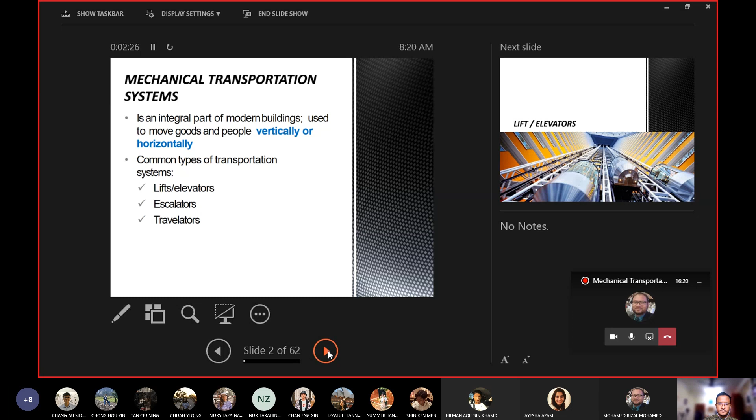Okay, so let's look at lifts or elevators. As you know, this is the most common transportation system in a building. So I think even in Taylor's also you can see a lot of lifts. So every block has at least, I think in block A got 2 lifts, B, C, D, and E got... I'm not sure, B I think probably just one, block C got 3, D and E also got 3 lifts or elevators. So it's a very common transportation system.

So if you look at the image below, do you know? I think you know that it is a lift lah. Definitely it's a lift, but do you know what it is called? That kind of lift is called a bubble lift. So it has glass walls so that people can see the surrounding. And normally it's used in shopping malls, when you have like a huge atrium, a huge area in the middle of the shopping malls, or we call it atrium.

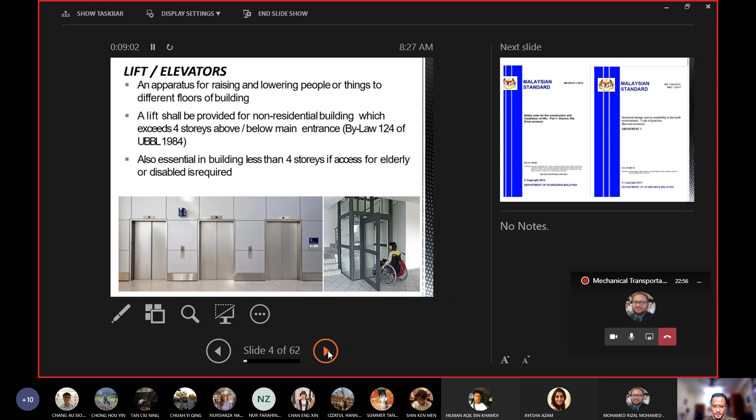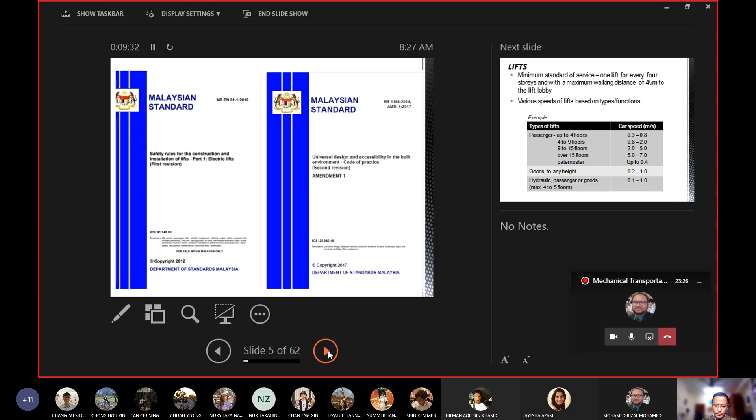So these are the standards used for installation of a lift. The first one is safety rules for the construction and installation of lifts, part 1, electric lifts. And then universal design and accessibility in the built environment, code of practice, second revision. These are the standards used when you deal with lifts in a building.

The minimum standard of service for a lift is 1 lift for every 4-story, with a maximum walking distance of 45 meters to the lift lobby. So it depends - for example, if you have a 4-story building, you only need 1 lift. Sometimes you can see in an apartment or flat, if it's a 4-story apartment, sometimes you don't even find a lift in a 4-story apartment. But the more expensive ones will provide a lift, though sometimes it's just one.

But if you go to a taller apartment building, let's say 8-story, then as the standard mentioned, 1 lift for every 4-story - so if you have 8 stories, you need to provide 2 lifts. That's one of the things you need to consider. Another one is the maximum walking distance to the lift lobby.

So let's say your building is very long. If the length is about 50 meters, then if you put your lift in the middle of the building, at the center, it solves your problem, because the distance from the lift lobby to the end of the building is just about 25 meters. So it's still within the minimum standard. But if your building is, let's say, 90 or maybe 100 meters, which is a very long building,

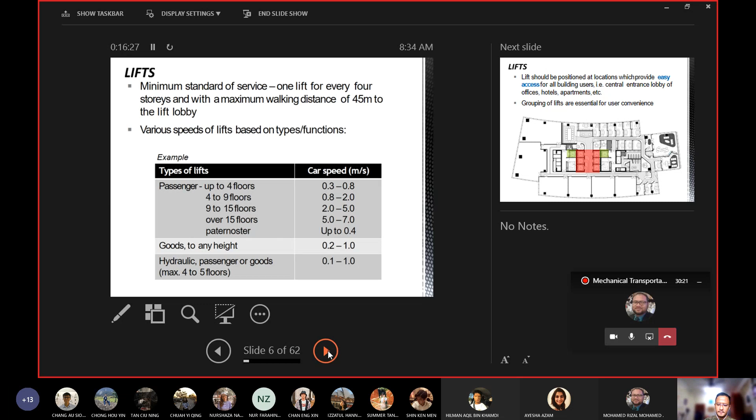Okay, so the position of the lift lobby, right? So lifts should be positioned at a location which provides easy access for all building users. For example, central entrance lobby of offices, hotels, apartments, and so on. This again is just a guide, right? But in the end, it depends on the architect or maybe the function of the building. So usually it's going to be right in the middle, right?

So if you have been to a high-rise building, you would notice that as you enter the lobby, normally the lobby is like a huge atrium, a double or triple story void. Then you would notice that just right behind the lobby, or maybe just next to the lobby, is the lift lobby, especially in hotels, apartments and offices.

But in some cases, like I mentioned earlier, the lifts are not necessarily right in the middle, but that would be the ideal one. Because of some constraints, it could also be located in other places, maybe towards the side of the building, or if you want to have two lift lobbies, you can have one on the left side and the other one on the right side. So that all depends on the design and also the function of the building.

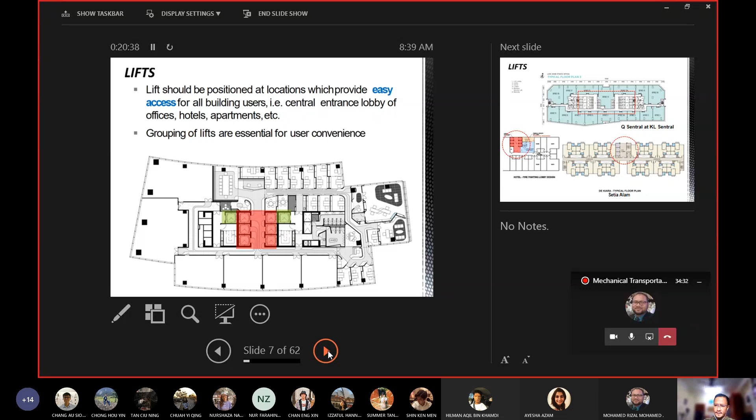in a high-rise building those pipes and conduits all need to be placed in the risers. If you have visited a building for your case study, probably you have not noticed the riser rooms. Those are placed near the core of the building. But the most important thing is the lift lobby. Another important thing is the staircase, the fire staircase. So these are other examples of the position of the lift lobby.

Look at the first one, Q Sentral at KL Sentral. The building is elongated, quite long, 100 meters long, like I mentioned earlier. You can see that there are two main lift lobbies for passengers. Label number one is the lift lobby. Normally for this kind of building, if it is quite long, it is divided into parts. As you enter the lobby at the ground floor, you either go to the right wing or left wing, or zone A or zone B.

Normally for an office, at the ground level you would know. Let's say you want to visit a specific office, maybe an architect firm. At the lobby, you already know where the office is located, which wing, which side of the building, which level. So you straight away go to that wing, push the lift button, and go to that level of the office. So each wing has its own dedicated lobby.

Sorry, I was disconnected. Mr. Adib, are you there? Mr. Adib, can you hear me? I think Mr. Adib is facing a bad internet connection. We wait for him. Hi. Hi, Rizal. Hello. Mr. Adib, I think it's better for you to turn off your camera. Okay, but can you hear me now? Can I proceed? Can you show us the presentation slide? Yep. Okay, we can see the presentation slide. Can you hear me? Cannot hear. Can you hear me now? Yes, I can hear you. Guys, can you hear Mr. Adib? Yes. Okay, you can continue, Mr. Adib.

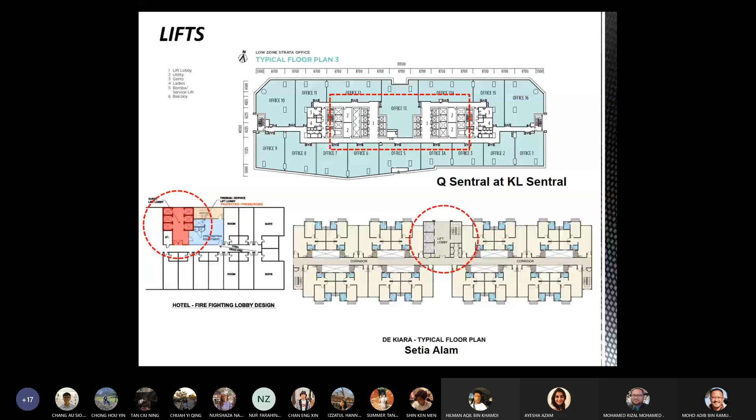So as mentioned, the lift lobby for an apartment can be placed right in the middle, together with the fire escape. That's in Federal Hotel, Kuala Lumpur, where you can see there are two lift lobbies, one with 3 lifts, in many different varieties. So probably the lobby on the right is to serve the rooms straight away, on the upper levels.

But the one on the left is probably to serve the rooms as well. But at the same time, because it has many different conference rooms, Penang Suite, Selangor Suite, Melaka Suite, and so on, there are more public using these rooms, so that's why there are more lifts in that lobby.

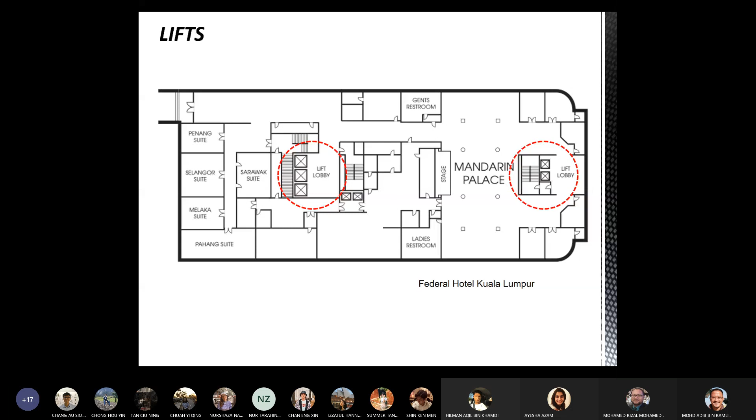So lift grouping. When a number of lifts are required, it is preferable to group them together. Wherever you go, you will see that the lifts are grouped in one lobby. Basically it's to reduce waiting time, so you don't have to wait for one lift to get to another level. When you group 3 or 4 lifts together and push the button to go up, all the lifts respond, so you just get into the one that arrives at that level.

And also to reduce cost of installation. When you install a lift, you require a lift core. The lift core walls enclosing the lift are made of reinforced concrete, which is quite thick, so it costs money. When you put all the lift cores together, you reduce the number of core walls compared to putting them at different locations.

According to UBBL, By-law 153, a smoke detector is to be provided at the lift lobby. And the lift lobby should be large enough to allow traffic to move in 2 directions.

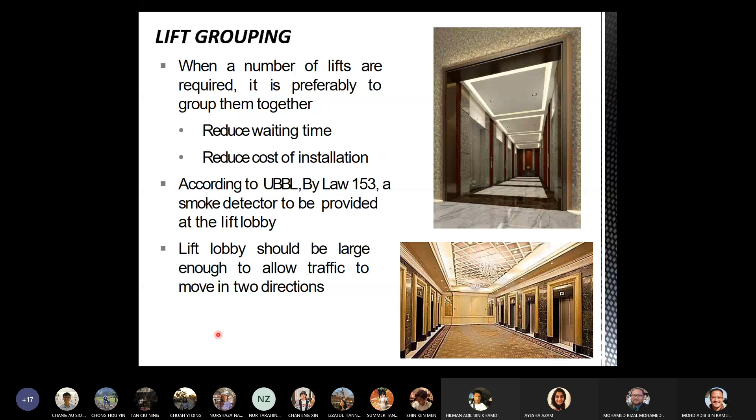This is some reference to the size of the lobby according to the number of lifts in the grouping. So if you have 4 lifts, normally 2 lifts on one side, the other 2 lifts on the other side. The width of the lobby is between 3.5 to 4.5, or twice the car depth. If you have 5, but very unlikely, very unlikely you have odd numbers. So most of the time you would see even numbers, either 4, 6, or 8.

So when you put it in the lift lobby, you can see that this is symmetrical, so you have 3 lifts on each side. If you have 3 plus 2, then it looks a bit weird. But the width of the lobby is the same, 3.5 to 4.5.

This is basically to allow for uninterrupted movement of passengers, those who want to get into the lift and those who want to get out of the lift.

But if it's only one side, for example like the one you find in Taylor's, you have 3 lifts grouped together but only on one side. So the lift lobby, the area in front of the lifts, can be not so big, as it can be just around 3.5.

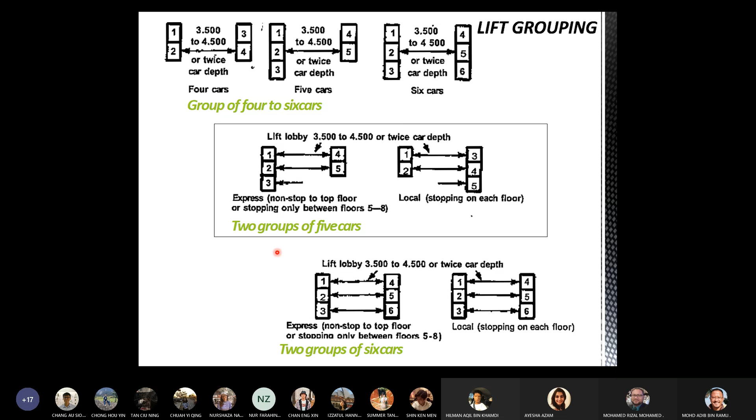So if you want to decide on the number of cars required for an office building and hotel, you can refer to that. For hotel, they go by the number of rooms. For big hotels, for each room, how you read that is basically if you have 90 rooms for the hotel, between 90 to 120 rooms, you only need one lift.

If you have that, one is for service oriented. For cheap hotels, budget hotels or economy hotels, for 150 rooms you only need one lift. But nowadays, I think if you go to any hotel, doesn't matter whether it's a budget hotel, at least you would have one lift to help people bring the luggage back from the lobby to the upper level.

But for office buildings, if it's service oriented, it goes by passengers. So you can see the difference, right? For office building, the calculation is based on passengers. For hotel, it's based on number of rooms.

For luxury office buildings, you can use that guideline: 150 passengers for every 150 people in that building, so you have to provide one lift. That's why, for example, if you go to KLCC, it's a very tall building with so many people there, so you can see a lot of lifts inside the lobby.

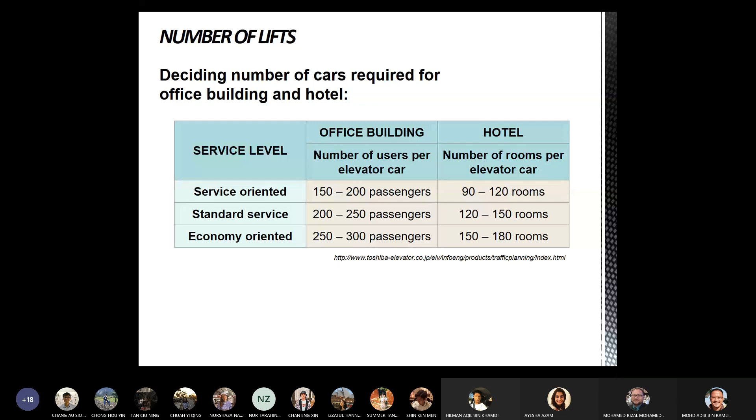Factors determining the number of lifts: first is the population of the building. You need to remember this, it would probably come out in the exam. Population of the building, the number of people inside the building, can be estimated by allowing between one person to 9.5 meter square to 11.25 meter square of the building's floor area.

For example, if your building is 100 square meters, if you go by this reference, the estimation is just about 10 people inside that, so the population of the building is just 10 people. If you're 1,000 square meters, then 100 people, so something like that. You have to allow one person to between 9.5 to 11.25 meters square.

Another factor is the type of building occupancy, whether it's a hotel, an office building, or a hospital. For hospital, normally you need to have a bed lift, which is commonly located close to the operation theatre in the hospital.

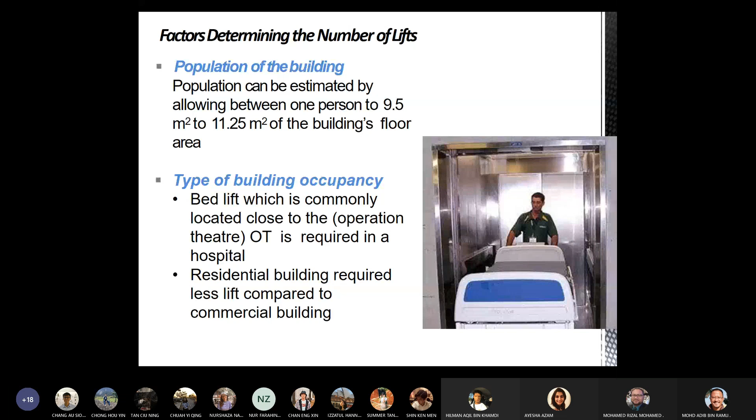Number of floors and height. As the number of floors increase, the number of lifts required also increases, because it takes time to reach from one level to another level.

The initial costs: as the number of lifts increase, installation costs and capital costs also increase. So if you are designing a building and the client is on a budget, maybe one of the costs you can consider cutting is the cost of the lift. If it's not really required for the building to have a lift, you can cut that part to save costs.

Maintenance costs: as the number of lifts increase, maintenance costs also increase. So if the building is really a budget building and the client has a low budget, once the building is completed, the budget for maintenance also is not that high. Then it might as well not have the lift, because it is costly to install as well as to maintain lifts.

You can see there are a few different capacities of lift. The standard ones are 15, 20, and 24 person capacities, but there are also smaller ones, just about 6 people, and so on.

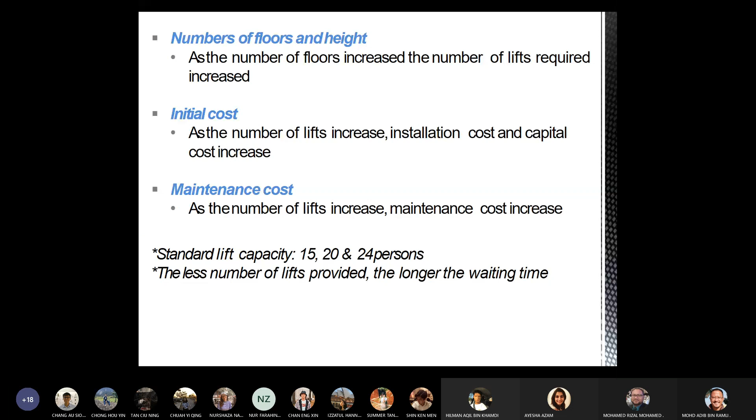Quality of lift performance is determined by the hoisting capacity or handling capacity — how many people the lift can carry at one time. This is a measure of how quickly a set of lifts can transport all passengers to their destination at peak period, calculated based on the peak period. If it's non-peak period, it's not really a problem — the lift would arrive quite fast because not so many people are using it.

But during the peak period, when everyone wants to use the lift, for example in the morning — like in Taylor's, the peak period is usually in the morning and afternoon, before and after class, around 8, 10, 12 — that's when it's busiest. I think the most peak time will be in the morning.

It's affected by the number of lifts and the size of the lift car.

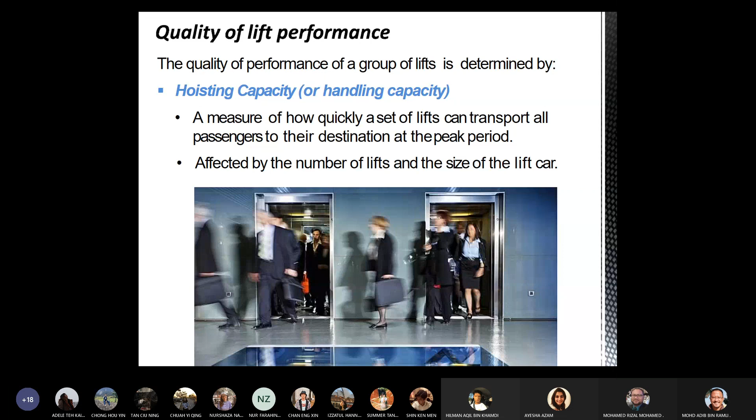Waiting interval: the maximum time in seconds between a call registered in the main lobby — when you push the button to call the lift during peak traffic condition — and the arrival of the lift. So how long do you need to wait for the lift to arrive during peak hour? This depends on the opening and closing speed of the lift car, the acceleration rate, the speed of the lift, and the time taken to enter and exit the lift.

That's quite technical, because lift design is actually a specialist job. I think you've probably heard some very popular names of lift manufacturers — there are a few of them.

But your role as an architect — the most important part regarding lifts — is basically to include the lift in the design. You need to plan out where to put the lift lobby, and roughly know how many occupants are in the building. From there, you'd be able to estimate how many lifts are required.

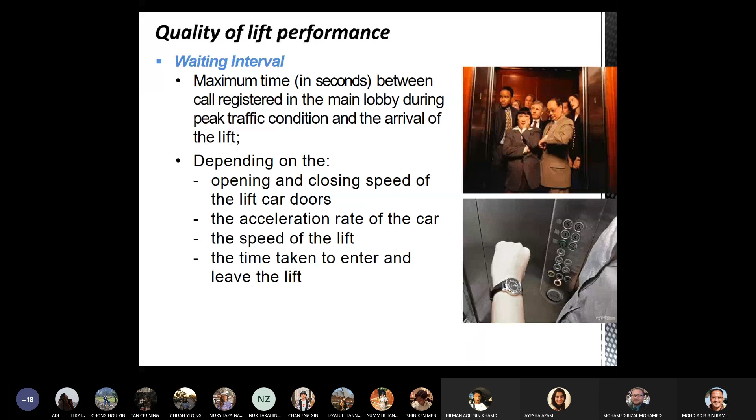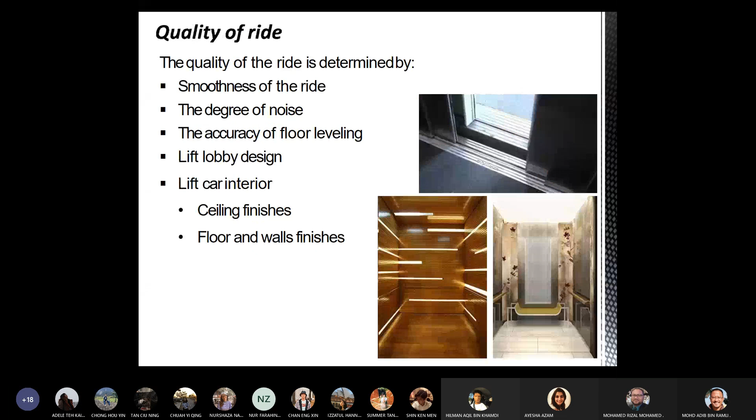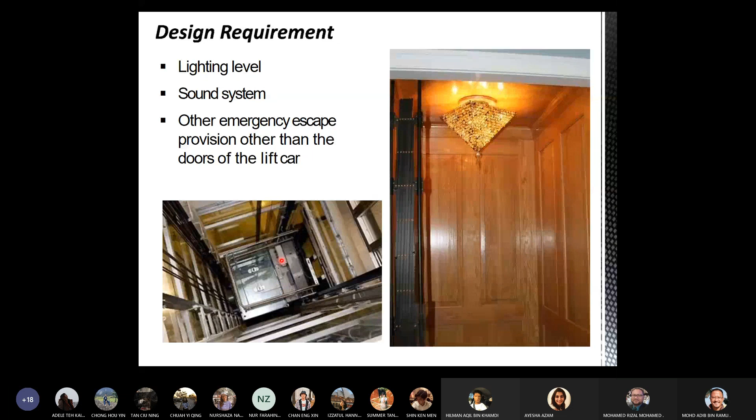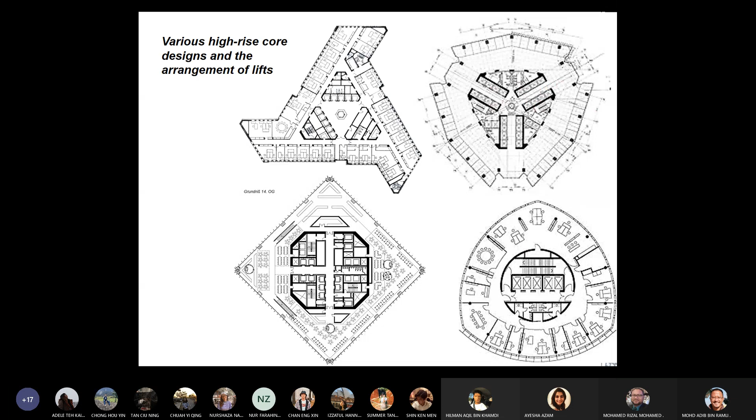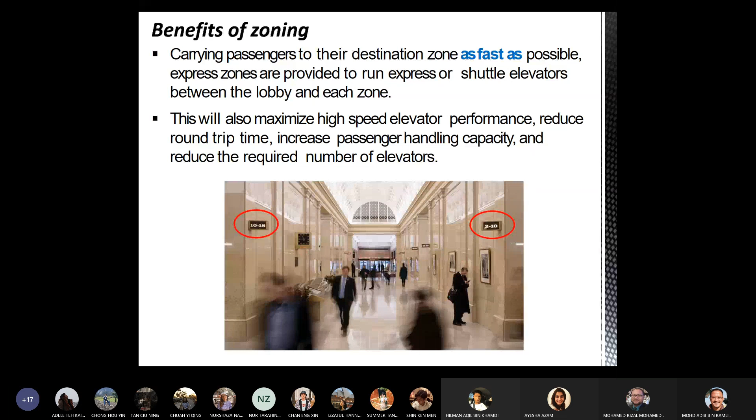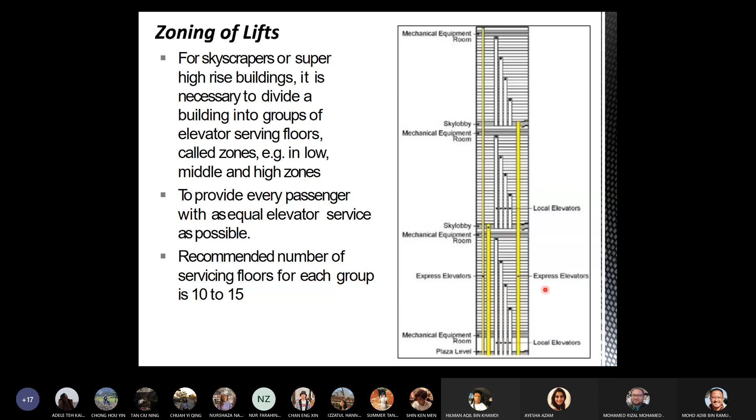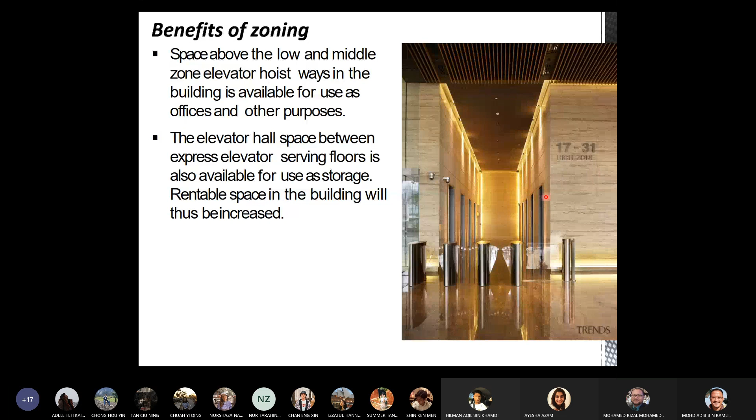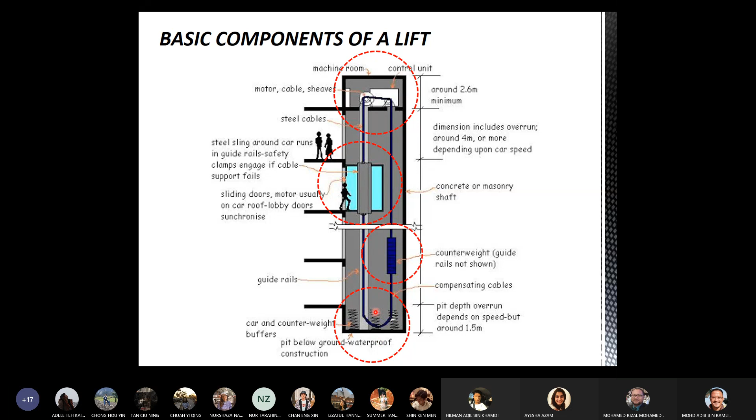So what's inside the machine room—basically the machine room is one component of a traction lift. Later on I will show you there are two types of lift: one is traction, one is hydraulic. For traction lift, the one that uses cables, we call it traction lift. So machine room is one of the main components.

It's preferable to site the machine room at the top of the lift to minimize the length of rope and optimize efficiency. I've never seen any building that has the machine room not above the lift—most of the time it's above the lift core or lift shaft. It should be ventilated, so you need to provide some ventilation. The machine room can also be placed at a lower level, but it requires longer rope and more pulleys, as well as increasing maintenance cost. So like I said, from what I've found, the lift motor room is normally located on top.

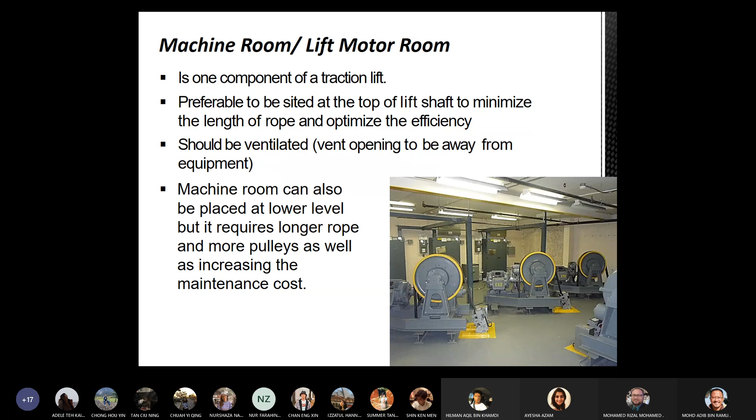These are the components—I think you can have a look later on.

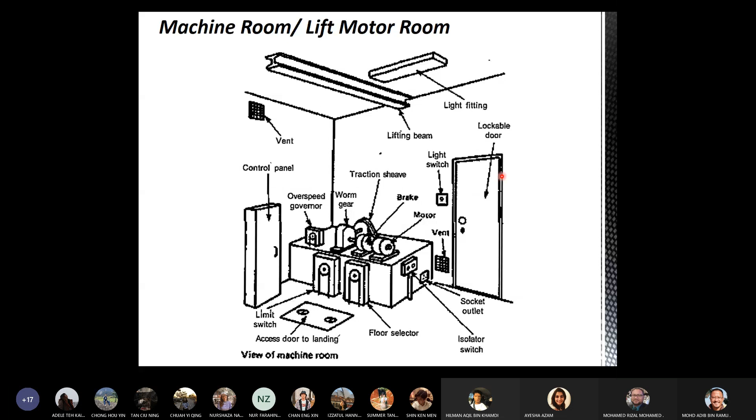Okay, so another main component. This is similar to both traction and hydraulic lifts, right? Definitely you need to have a lift car. For all lift systems you need a lift car, right? If not, how would you use the lift without the lift car? So basically the car moves in a vertical shaft to carry passengers or freight between the levels of a multi-story building. Okay, I think everyone knows that.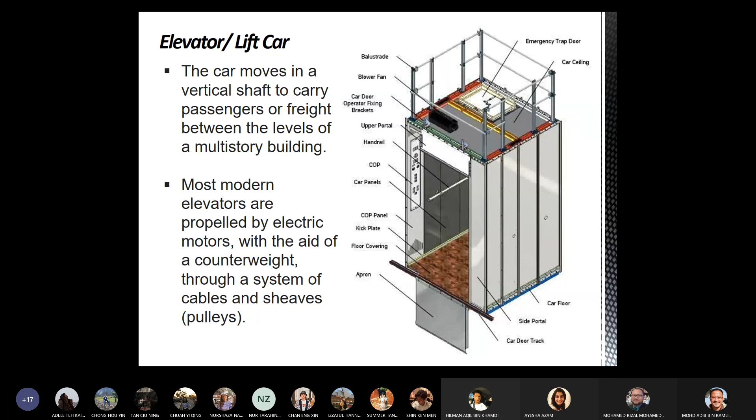Okay, the counterweight is basically a heavy weight to counterbalance the load of the elevator carriage, so the motor lifts much less of the carriage weight. So let's say the total weight of the lift car is 1,000 kilogram capacity, but this counterweight, I don't know exactly how heavy it is, but let's say the total weight here is like 500 kilogram.

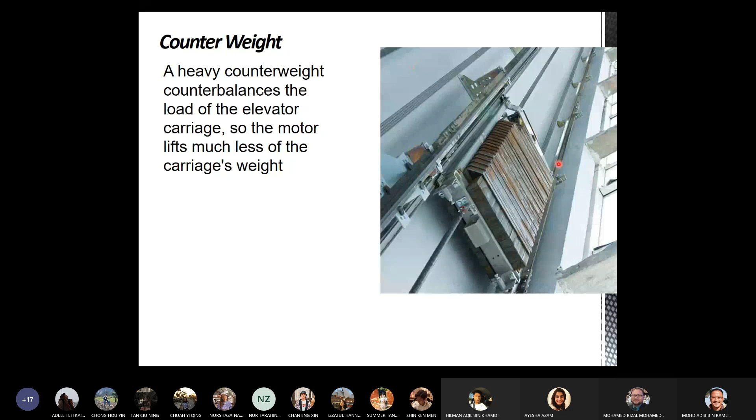Okay, so basically the motor of the lift just needs to lift up, let's say, only 500 kilogram instead of 1,000, even though the capacity of the people inside the lift is 1,000 kilogram. Because this counterweight is 500 kilogram, the motor only needs to lift up 500 kilogram. Something like that.

Okay, lift shaft and pit. The size of shaft required depends on the size and speed of the car, and also the type of door gear. Last time when I was a student, my reference was the New Metric Handbook, right? Inside that handbook you can find all the dimensions that you need, transportation, lift, whatever, you just name it. Anthropometry, everything, including lift.

Normally when I was a student and designed the lift core, I would refer to the handbook. So if the capacity is this big, let's say 10 people, what's the size? You can just refer to that and take that reference. Another way to make reference is to find a manufacturer of the lift. Normally they would have a catalog with complete sizes and dimensions.

Right, so the lift shaft is extended below to form the lift pit. This is what a lift pit looks like. You can see this is the buffer. Just imagine the cable of the lift snaps and the lift car moves down, right? It won't straight away crash to the ground, to the cement, because there is this buffer. I don't know how severe it's going to be even with the buffer, but at least there's something to stop the lift car from crashing to the ground.

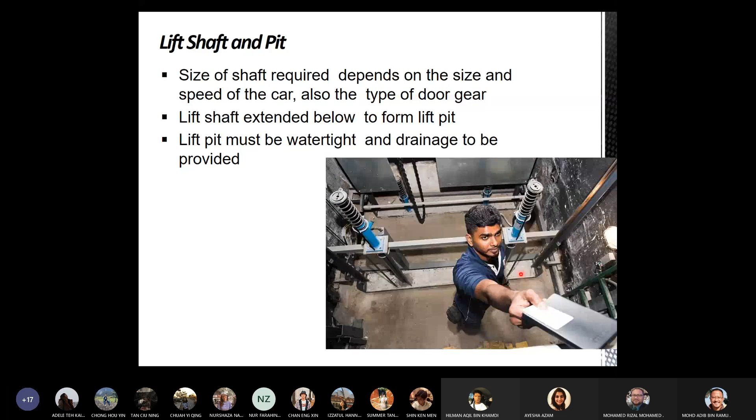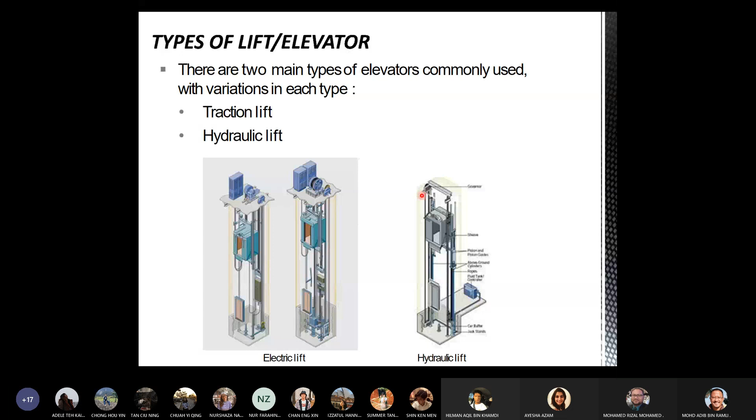Okay, types of lift or elevator. There are two main types of lift, as I mentioned. First is traction lift, and the second one is hydraulic lift. So traction lift, there are two variations. One is traction with machine room. Another one is machine roomless traction. Both are traction, but one with machine room, another one without machine room. So you just need to remember that.

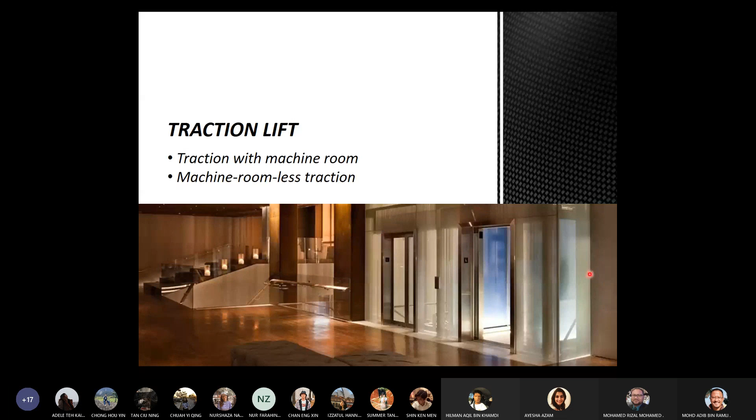So traction lift is lifted by ropes, cables or ropes here, just like the one that I've shown earlier, attached to an electric motor above the elevator shaft, inside the machine room that I've shown earlier. Used for mid and high-rise application and have much higher travel speed compared to hydraulic elevators. They're faster compared to hydraulic lift, and it is used in taller buildings.

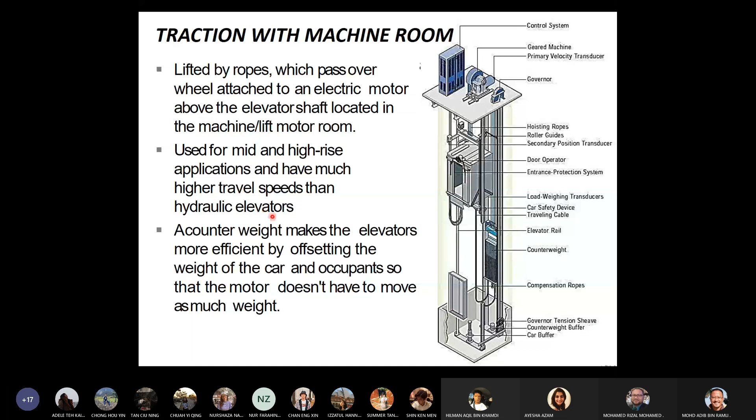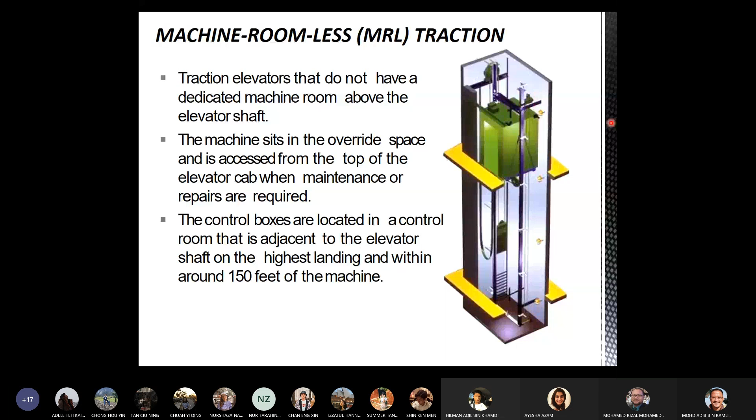And we lecturers always see people carrying out maintenance work from level 9. The maintenance workers for the lift actually access the lift from level 9. They don't go up to another level because there's no other level, no machine room on top. So basically Taylor's is using this kind of lift. I think a lot of modern buildings nowadays are using this kind of system. Maximum travel distance up to 76 meter and can travel at speeds up to 152 meter per minute.

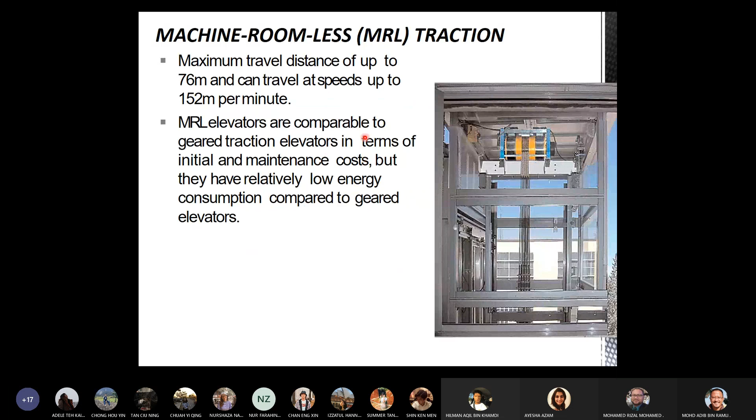It's low energy consumption compared to the other one. Okay, advantages of this machine roomless or MRL traction: improve aesthetic view of the building. So if you look at this section compared to the one previously, you can see that there's a protrusion of the lift machine room, the lift motor room, on top of the roof.

Let's say this is the rooftop. So on top of the rooftop, you have another space on top for the one with the machine room. But using this MRL traction, there's no need for that space. So basically, the floor can just end at that level.

But usually this top floor here, the ceiling height needs to be slightly higher, because the lift will actually stop somewhere here, so you still need to have a little space here to place the motor. It cannot be the same height as the other floors. Same goes to Taylor's. Basically, the top level, the roof is using roof trusses, so the ceiling height is higher.

So even with this machine roomless, it can be either on top or at the bottom, but inside another space. But normally it would be advisable to use this one, very straightforward. All the machine, everything is within the shaft itself. But even though it's machine roomless, it still requires the pit. The pit is required for all types of lifts, whether it's machine roomless, with machine room or hydraulic lift, so all need to have the lift pit.

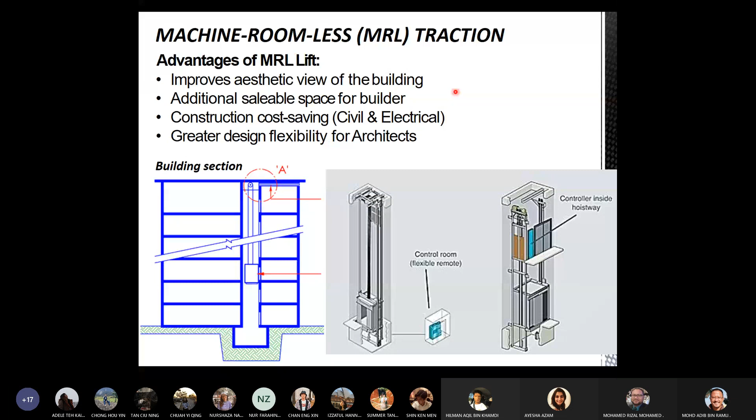Okay, so comparison between traction with machine room and MRL traction. One is with machine room, another one without machine room. There are pros and cons, right? From the maintenance workers' perspective, they would say it's more difficult and more dangerous to maintain this lift without the machine room, because they have to stand above the lift car, and there's a risk of falling down from the lift car to the shaft.

But if there's a machine room, they can comfortably stand on the floor without having to worry about the risk of falling, and they can see all the components clearly. So that's from the maintenance workers' point of view. But in terms of design, of course, the one without the machine room would look sleek. Compare this one, both buildings are in Singapore.

The one on the left is with machine room. You can see the height, this is the lift shaft, and then on top of the lift shaft there's a motor room, which is extended high above the roof level. But the one on the right is without machine room. It is slightly extended, but not as tall as the one with machine room.

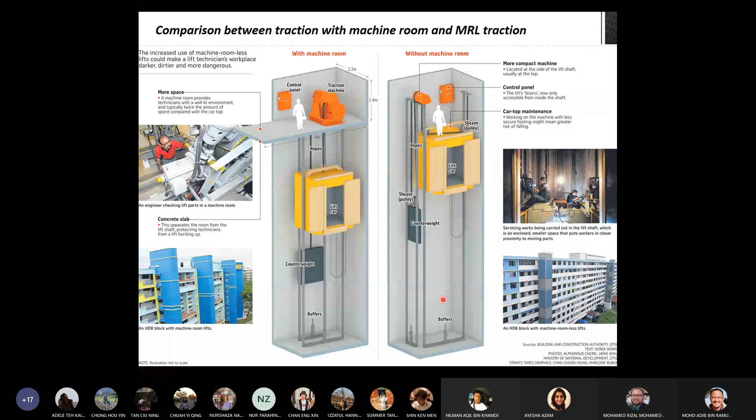Right. So another one is hydraulic lifts. Rather than using cables, it is supported by a piston at the bottom of the elevator that pushes the elevator up as an electric motor forces oil or another hydraulic fluid into the piston. So basically the motor is located in a room next to the shaft, but not on top, right?

If you look at this diagram, it's located at the side of the shaft, and then there's hydraulic fluid inside the pipe. It will pump the oil to move the piston that pushes the car. So this is the piston. The mechanism is very different from the traction lift. The elevator descends as a valve releases the fluid from the piston. So that's how it works.

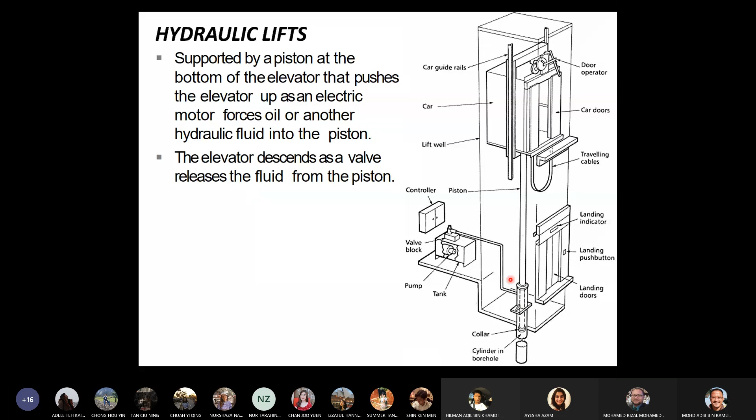This kind of lift is used for low-rise applications between 2 to 8 stories. Earlier I mentioned maximum 5. It depends, maybe because technology evolved; probably nowadays they can make hydraulic lifts that go to higher levels. It travels at a maximum speed of 61 meters per minute. The machine room is located at the lowest level, adjacent to the elevator shaft.

Suitable for goods lifts, lifts for hospitals and old folks homes, because using hydraulics, the movement is very smooth. That's why it's good to be used in hospitals and old folks homes. And it's quite strong, so you can lift up goods and things.

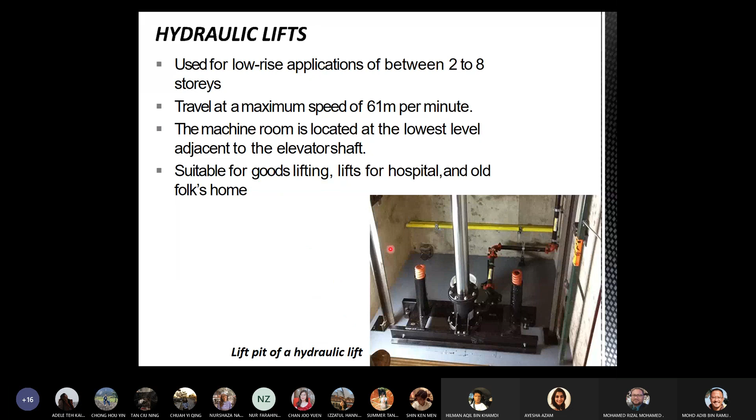Advantages of hydraulic lift: operation is simple, lower maintenance costs. The load imposed is lower compared to electric traction lift. No need for brake, ropes, pulley, driving sheaves, and so on. So no need for counterweight, and you can have a larger lift. Extremely accurate floor leveling can be achieved. Acceleration and travel is very smooth. Okay, so those are the advantages.

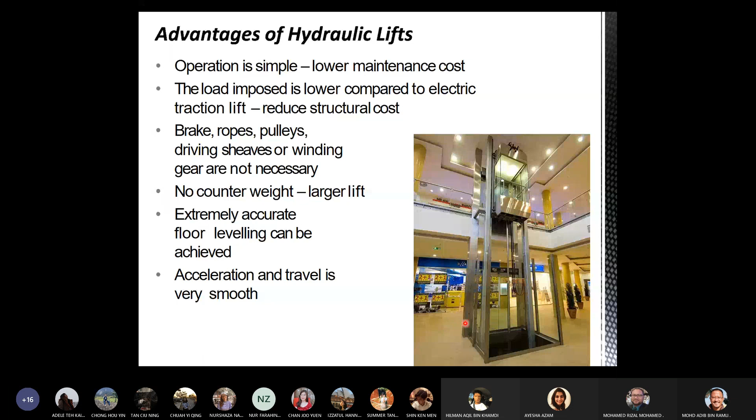Comparison of floor space utilization between different types of lift. The first one on the left is traction with machine room. The one in the middle is machine roomless. The one on the right is hydraulic. In terms of space usage, you can see that the machine roomless is the best, because it requires less space.

Compared to traction with machine room, it is lesser by 35% usage, and compared to hydraulic lift, reduced space usage by about 30%. But of course, in the end, it depends on the purpose of the lift itself.

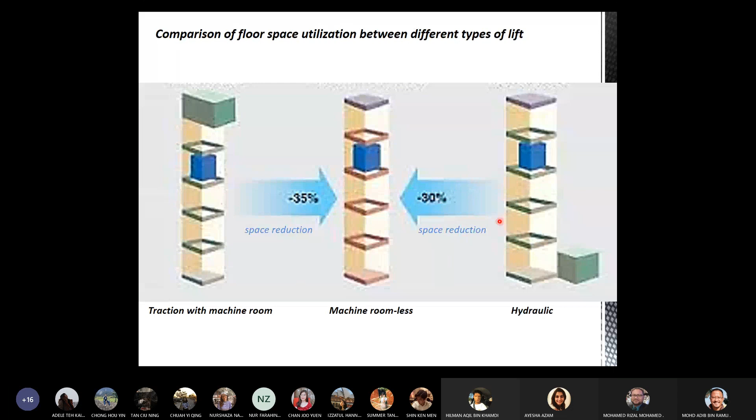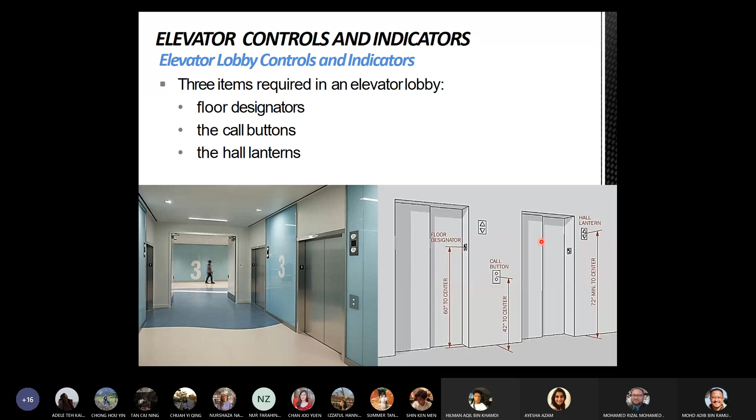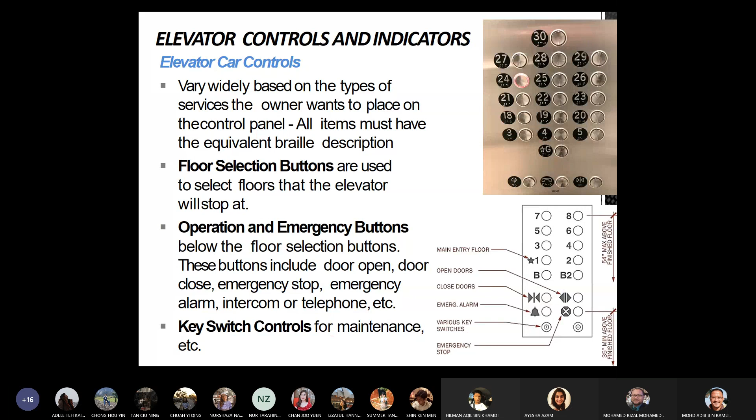...a steel structure to replace the reinforced concrete shaft, and then covered with glass, to allow people from inside the lift to look outside. It looks nowadays it looks nicer, right? If you did this back in the 80s or 70s, I think everyone would curse you, maybe. But nowadays it's kind of becoming the norm to see this kind of lift shaft.

And then to lift goods or freight, I mean boxes, things basically other than people — cargo and so on — and also vehicle elevators.

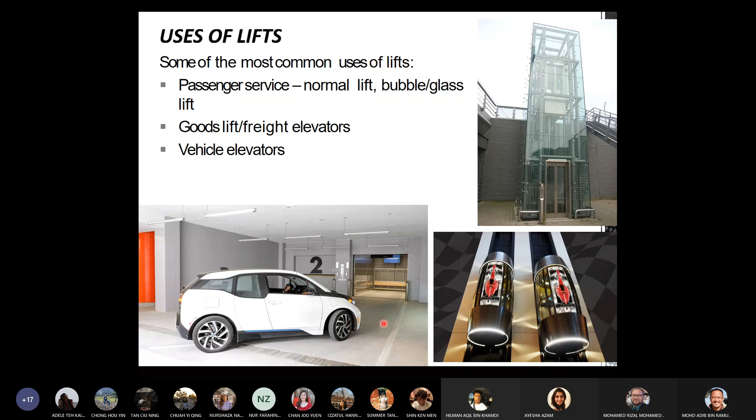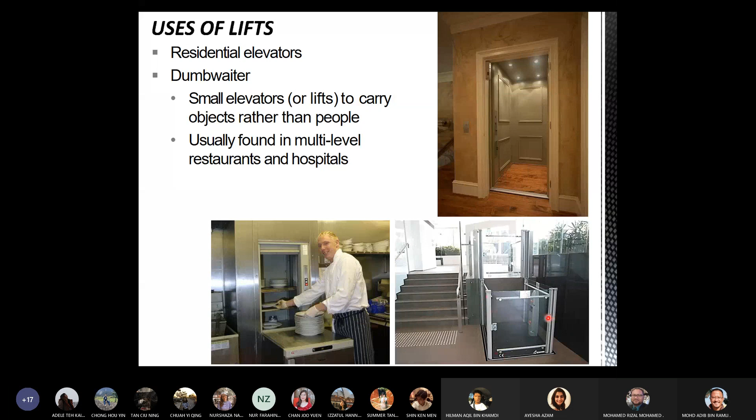Normally used in restaurants, hospitals, and so on. If you have been to GB&Co at Empire, you can see this dumb waiter is quite obvious. This is like a lift for wheelchair. Even though the level is quite low, maybe just 1 meter, but because you cannot provide a ramp, as an alternative you can provide this wheelchair lift. It's quite common in Europe, but in Malaysia it's not so common. People will use ramp more often compared to this kind of lift. Another one is stage lift.

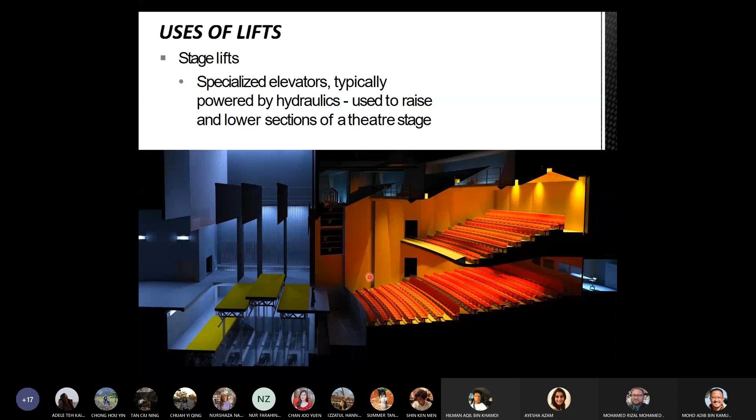The second one is escalator. I think it's quite straightforward. Compared to lift where we have to wait to get into the lift to get to a different level, in escalator it provides immediate means of transportation. It is non-stop, you can easily get on it and it continuously conveys and moves a large number of people. It can help increase sales on all shopping levels, as ordinary stairways limit customer frequency on the upper floors. So how many times do you take the staircase from one level to another level?

Be it in the shopping mall, normally I would say maybe some people never take the staircase, right? So they will either take lift or escalator. So this is what it means, because if the escalator is provided in the shopping mall, then it would increase the sales on the upper level. Basically all levels would have the same sales, I would say, for all levels. But if they don't provide escalator in shopping malls, then nobody goes higher to the upper levels. If you ask me, I don't really like to take lift also because you have to wait, so in the end you just walk on the ground level. You are not going up to the other level.

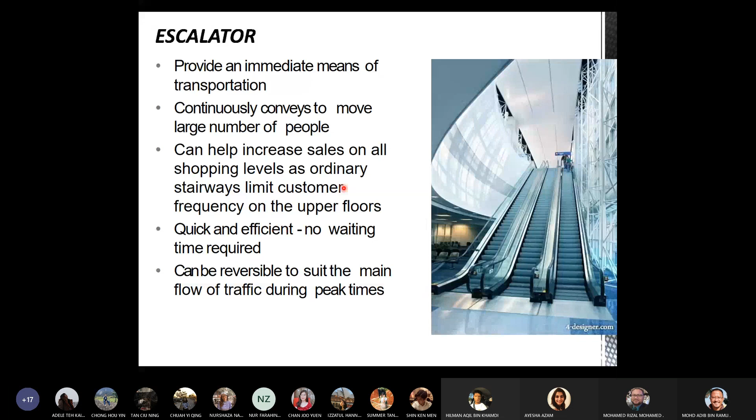Quick and efficient, no waiting time required, can be reversible to suit the main flow of traffic during peak times. It should be located at a location easily seen. Carrying capacity of escalator depends on the speed and the width of tread.

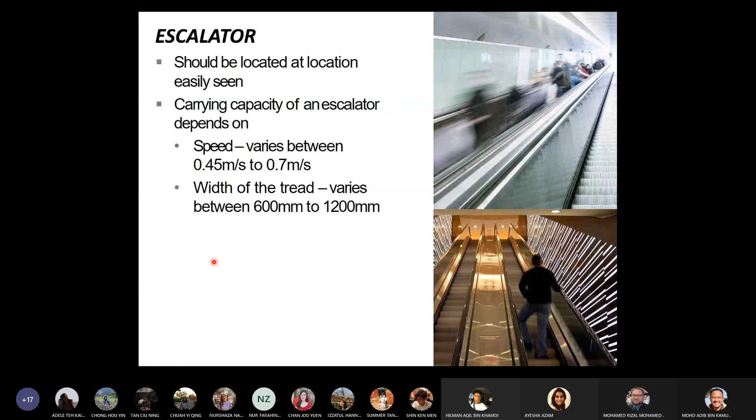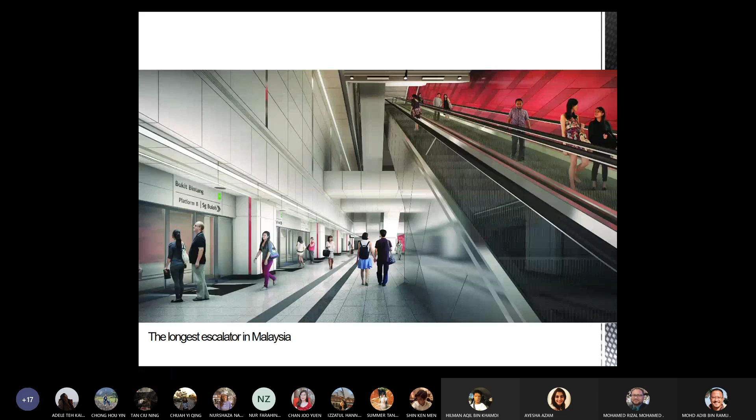Only yesterday I came across this huge billboard, driving from KL to Taylor's. There's a huge billboard, I think from Schindler or something, the name. They claim that they installed the longest escalator in Malaysia in the Bukit Bintang MRT station. I believe this is the one, so I don't know how long, but they claim that's the longest in Malaysia. But if you have been to an MRT station, you would notice that the escalators are quite long actually, because they go underground, very deep underground, so that's why it's quite long.

So escalator arrangement: the first one is single bank with interrupted traffic in one direction. Meaning that you go up one level or you go down one level, and then you have to turn around and go up again, same direction. Usually used in shopping malls which are not so high, basically to encourage people to walk in front of the shop. Shopping malls want you to shop, so as you go up the level...

Mr. Adib, we cannot hear you. Hello? Yes, Mr. Adib, I don't know what happened to my internet. Okay, just a little bit more, I might need to extend the time a bit. Is it okay, Mr. Rizal? Yes. Okay. Which was the last part? Escalator.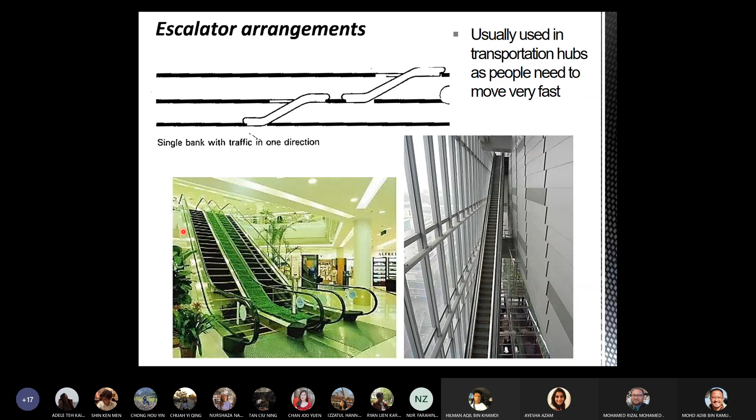Let's say this one, you go up, and then straight away you find another escalator up here. So just one direction, and you can go from ground straight away to the upper level without having to move around, just like the previous one. The easiest one nowadays you can even find this kind of very long escalator, like in MRT stations, usually used in transportation hubs as people need to move very fast. In shopping malls it's different because normally you're not rushing. You are there to shop, so they want you to move around and look at the shops before taking another escalator. But in transportation hubs everyone moves very fast, so the escalator needs to be in one single traffic, one direction.

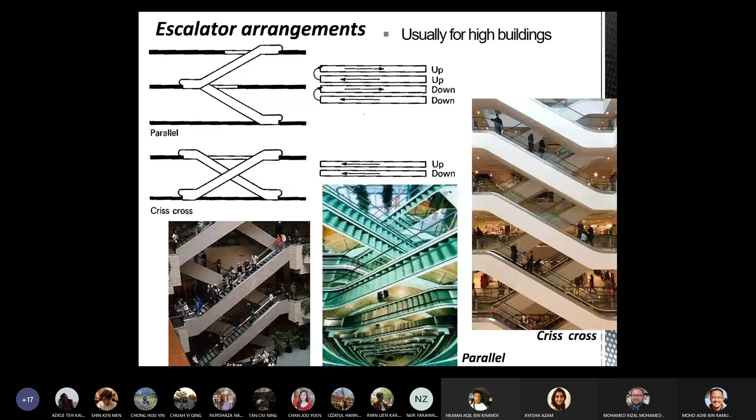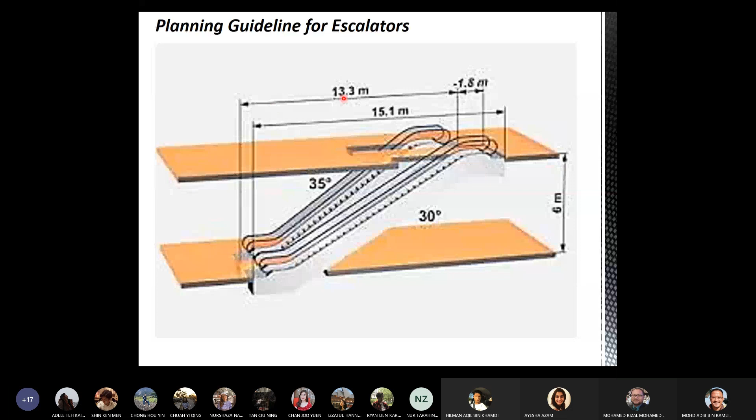Then the planning guideline for escalators. These are the basic dimensions: floor to floor height preferably about 6 meters. There are two types, normally 30 degrees or 35 degrees, depending on the height. If it's 6 meters, then the length using 35 degrees is 13.3, and if 30 degrees, it's 15.1. So that's basically how you read the diagram.

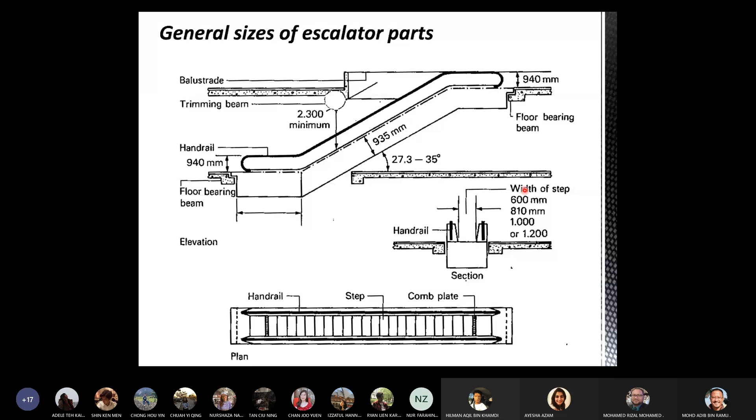So these are the different components. I think later on this is the details. So these are the components, just for knowledge.

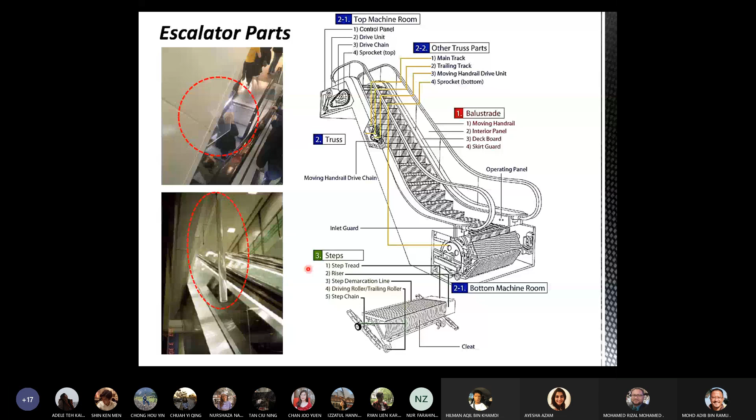If you're using escalators, you would be able to see this triangle, basically for safety purposes. In other places, though I've not seen this in Malaysia, maybe overseas, they have this kind of thing to alert people if their hand is jutting out from the escalator. If they don't move their hand, it might get into the space between the two escalators and break or something. That's for safety purposes.

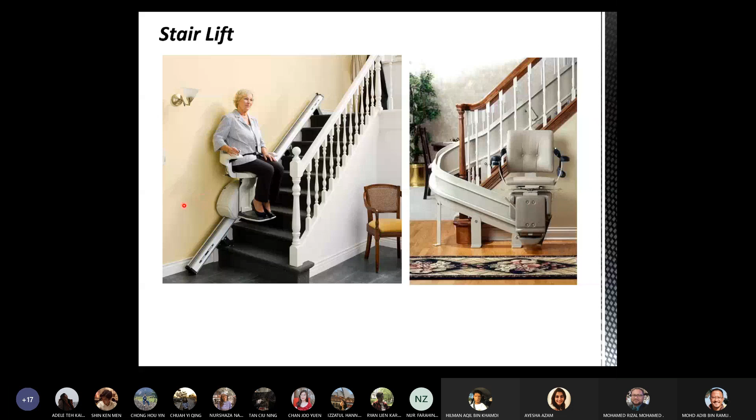Another type of transportation is the stair lift, something like an escalator but just for disabled or elderly people to sit on, and then the chair moves next to the staircase. I think you can find this in the KLCC LRT station.

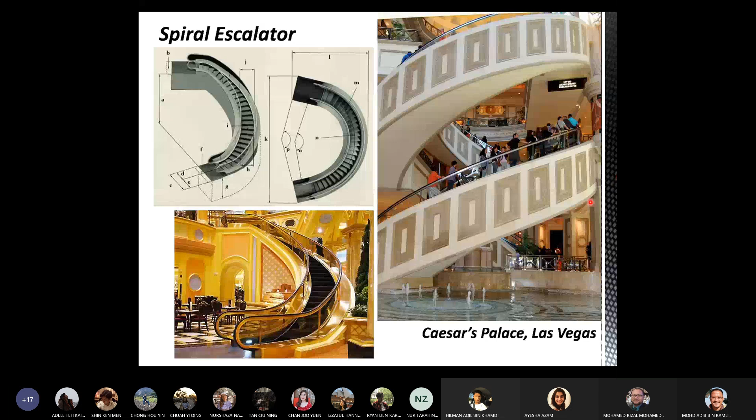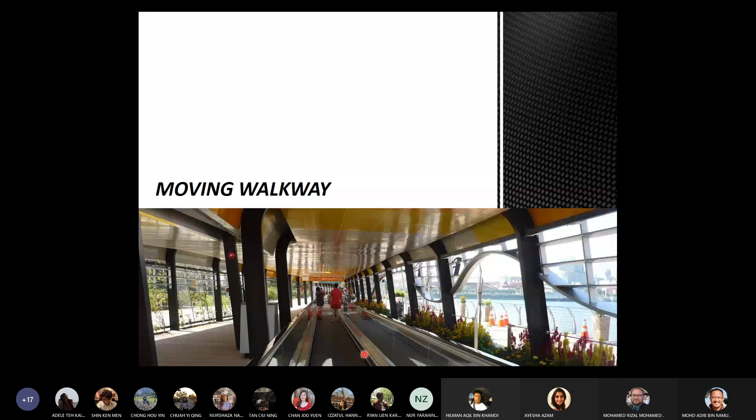Moving walkway - I think everyone knows this and has gotten onto one at least. It's intended for horizontal movement, and can be either flat or inclined up to 15 degrees. The width is between 0.6 meter to 1 meter, usually used at air terminals, railway stations, and shopping centers.

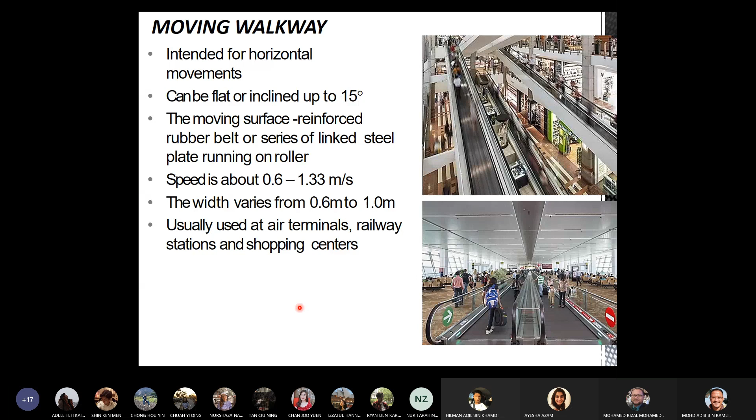Basically to make people walk faster. So normally if you use this moving walkway, it depends - if you're lazy to walk, you just stand there and it carries you to the next point. But if you really want to be quick and move fast, you can also walk on top of the moving walkway to arrive faster.

The guideline is something like this: if it's 10 degrees and the height is 4 meters, then the length is 25.9. It uses more space basically, it's longer.

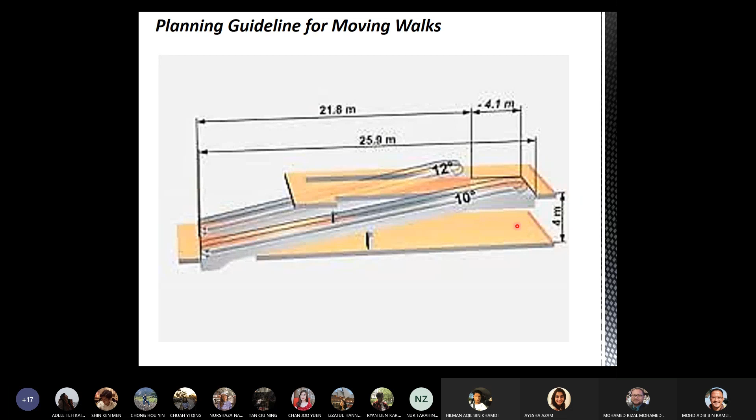All right, so basically that's the end of my slide. Any question before we proceed with the tutorial session?